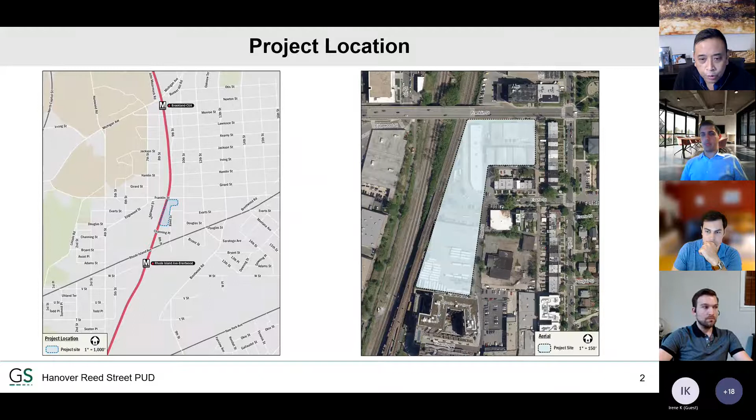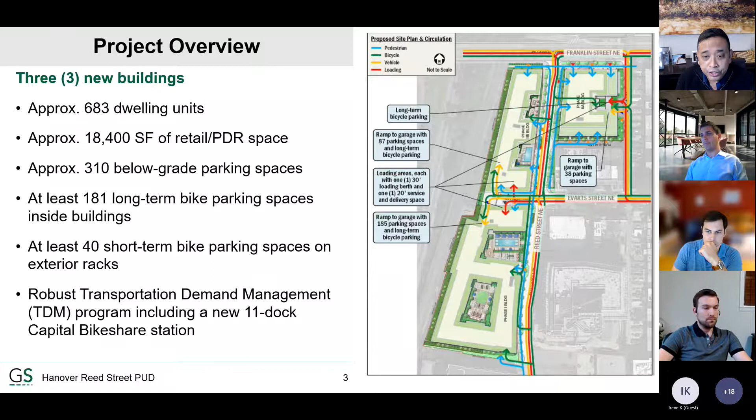When we look at the impacts of a project like this, typically what we do is we meet with DDOT and identify the parameters with which we do our study. As part of that scoping process, which is a formal process that has guidelines, we've identified 11 intersections that we studied. Based on the maximum development plan, we've identified that during the peak hour - the peak hour in the morning during rush hour and the peak hour in the afternoon during rush hour - the project overall will generate 112 trips in the morning and 168 trips in the afternoon. What that means is there's a portion of those trips that are either inbound or outbound. So the total of inbound and outbound is 112 in the morning, and the total of inbound and outbound in the afternoon is 168 during the peak hour. This is an industry standard, and it's a district standard with which we try to identify the impacts related to the project. Next slide.

Erwin, what are the peak hours? What does that mean, what are those hours? So it's the peak - it's the peak hour between 6 and 9 in the morning, essentially the peak system hour between 6 and 9. So you look at all of the intersections and the way they operate between 6 and 9 a.m., and we pick the hour that's most consistently the highest within that hour. Then we do the same thing in the afternoon between 4 and 7. Will, can you look for that, so we can answer Andrei's question as we move forward?

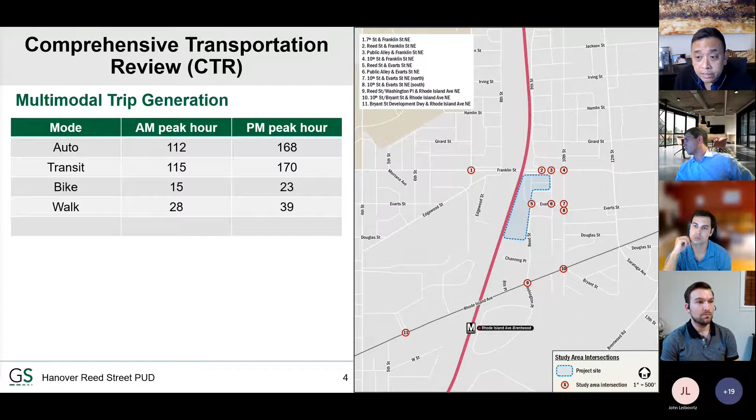I don't want to belabor it, but I was surprised you only pick one day to do your measurements, and it's all sort of extrapolation from that. So typically for the DDOT studies, you pick a typical weekday, and there's an understanding from DDOT that it's an average day. Maybe on any given day it might be a little higher or lower. That's why they don't like us taking traffic counts on a Monday or Friday, because there's more variability on days like that.

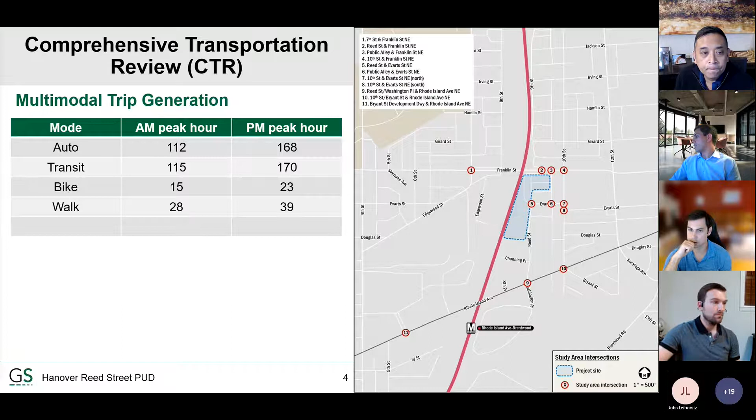Next slide. This essentially goes through what our findings are. As I mentioned before, we were required to study 11 intersections. 3 of the intersections have been identified as impacted. 2 intersections along Rhode Island, which are Rhode Island and 10th, and Rhode Island and Reed Street, currently operate above what's commonly known as acceptable levels of service.

There's somebody, Michael Tran, who has raised his hand.

Oh, hey, sorry, I joined late and you might have covered this. Just on the measurement piece, I know I had told a few of the other neighbors, and Raw as well, that one of the measurements was right in front of my house on Evarts and Reed Street, and Reed Street was blocked off that day. So I just want to make sure, did you guys do it again?

If I could answer that - we looked back at the data and the video as well, and there were no interruptions that we saw on Reed Street traffic during the peak periods. Maybe that happened in the middle of the day, because we study the peak morning and peak evening commuter periods, and the video showed nothing closed.

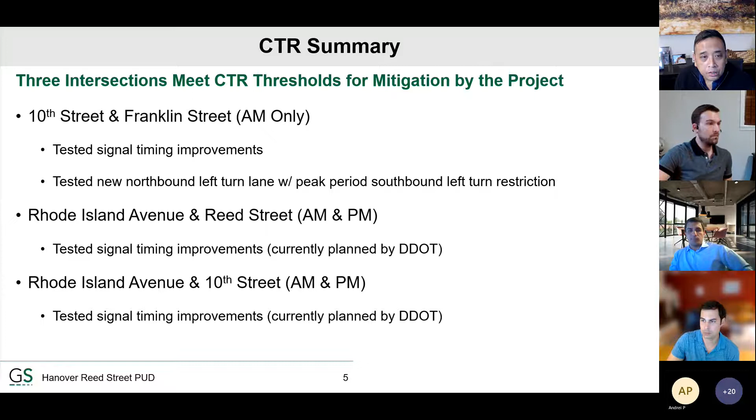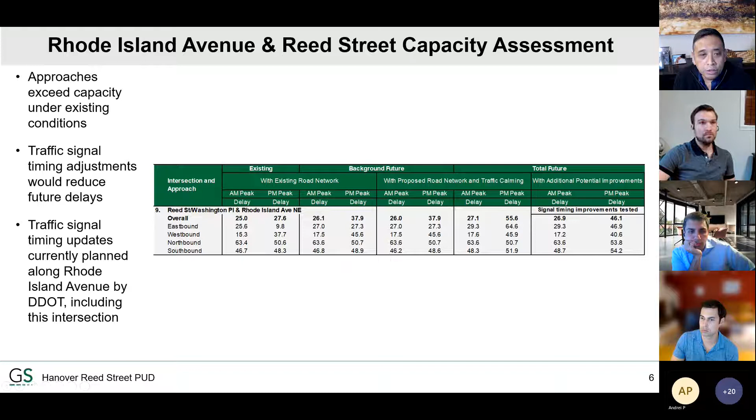With our traffic those get increased, but with the proposed signal timing adjustments those are mitigated. Similarly at the intersection of Rhode Island Avenue and 10th, we have a similar condition where there are delays in the morning. With additional traffic, both background and our project traffic, those are increased, but with proposed signal timing adjustments they're mitigated down to better than existing conditions.

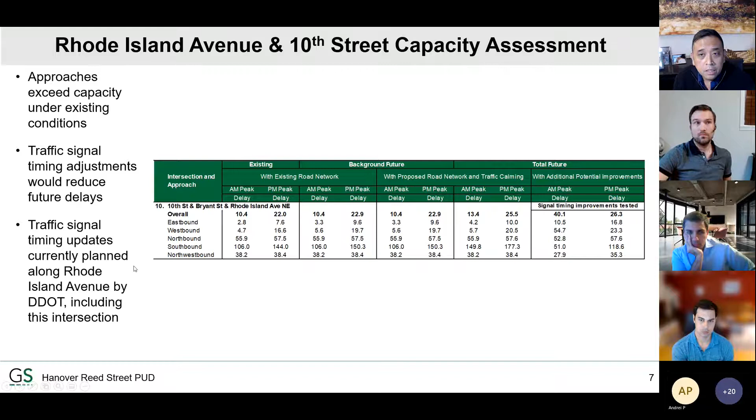The intersection that is of concern is the primary intersection of 10th and Franklin. What we've identified at this intersection is that it operates above capacity in existing conditions. Because of some of the changes we're making, there are two impacts that add to the intersection of 10th and Franklin.

The first impact is what's currently happening today, based on our early community meetings, is that there's a significant cut-through issue that many of the residents on the call today experienced in the alley that runs from Evarts to Franklin. Based on our data collection, it turns out that in the existing condition there are a couple hundred vehicles a day that cut through that intersection, head north on the alley, and turn left.

Because we are creating a plan that will no longer allow those people to cut through the alley and turn left, those vehicles will no longer go up the alley. Those vehicles will now head towards 10th Street to go up and turn left.

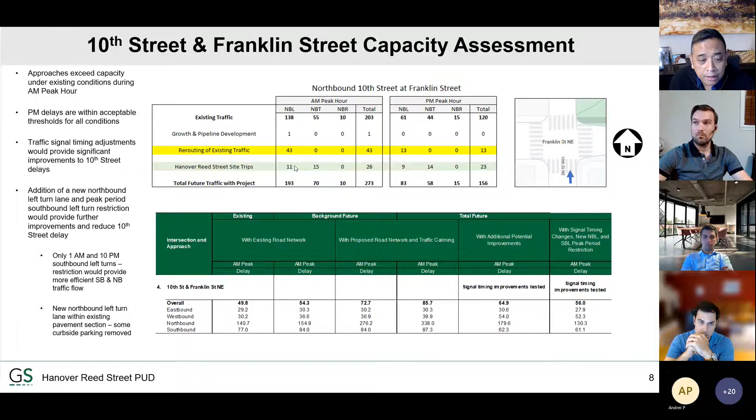In that same time period, we're going to be adding traffic to the intersection of Franklin and 10th of 11 cars turning left and 15 heading through. So the additional impact of both the rerouting of traffic and our project traffic is a situation that increases the delays at this intersection.

It's important to note that even though we are adding traffic at this intersection, the biggest contribution is the fact that we're eliminating the cut-through traffic in the alley. Because of that, we've looked at several ways to mitigate that intersection.

In the potential to mitigate the impact at 10th and Franklin, we have several options. The first is retiming that intersection. The second is potentially adding a left turn lane on the northbound side of 10th Street.

In those instances, we are able to reduce the impacts of both the cut-through traffic as well as our project traffic. However, I think what is more important is that, as Dan had laid out at the beginning of this call, we took another look at the potential for a traffic signal at Reed and Franklin, which would also mitigate this intersection.

So, Erwin, can we, before we move on, just because I know this intersection is so important, let's just make sure everybody understands the chart. So let's make sure I understand the chart.

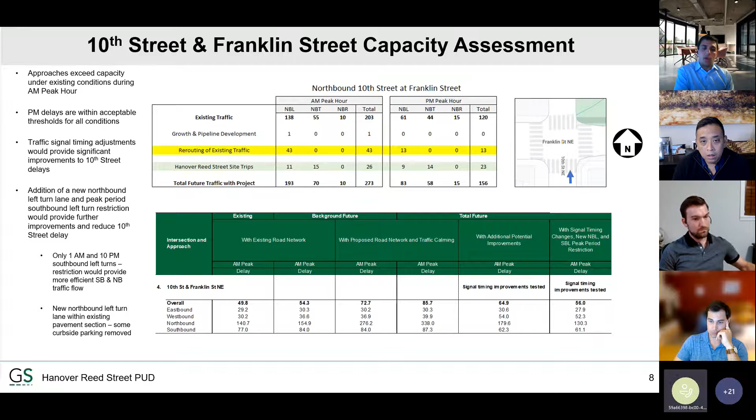How is he a 200 footer? When I'm right behind the apartment building. He's within 200 feet of building 2A.

And as you noted, there's a new apartment building between you and the project. That new apartment building was built by right. We were not involved at all in that apartment building, although to the best of my knowledge it was built legally, by right. This project is a PUD, which does require community input.

We will flyer for the SMD meeting so that you can attend that. I am concerned, so I am not at all interested in cutting you off. At the SMD meeting, we will do a top to bottom discussion of the whole project.

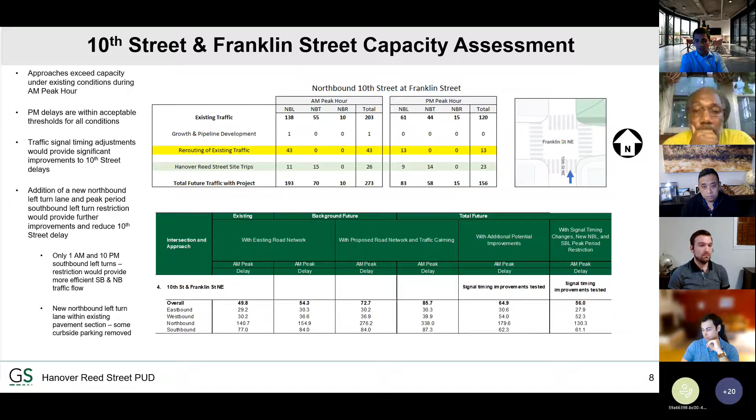The main focus of a lot of residents' concerns who we've been engaging with is traffic, and this meeting was scheduled specifically to address the traffic concerns. It sounds like you have higher level concerns with the development, just whether there should be additional development.

I mean, I'll tell you, if not this, the owners of the property will build something else. But obviously, I am the developer here. I am seeking community support. We would love to have your support.

And the next SMD meeting will be in person. We'll stay as late as we need to address all of the questions. You can talk to me in front of the crowd, you can talk to me individually, we can take you through the project. What I can't do on this call this evening is go top to bottom through the whole project with you.

I apologize, I am sorry that you did not receive notice. We were trying— No, I don't want to hear that. I don't want you to apologize. I don't want to hear apology, don't even apologize. Okay, because it didn't have to happen, it shouldn't have happened. So don't apologize for something that should have happened that you had control over. There's no apology needed for that.

Because you messed up, in other words, I could use the F word, but you messed up. You messed us up. You're talking traffic, you're talking traffic on 10th Street, but you say I'm not a 200-footer. But you're talking about disrupting traffic in front of my house.

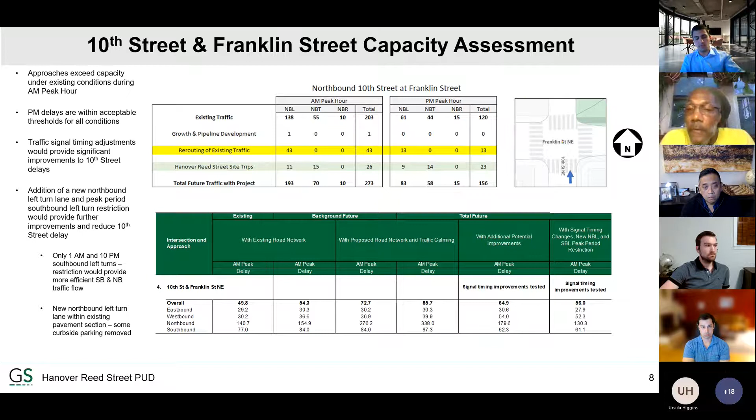None of this accounts for the light. We want to present the light. Erwin, let's go to the next slide and keep going. So the next slide is consistent with our presentation related to 10th and Franklin. And obviously, in order to get to 10th and Franklin, you have to go through 10th and Evarts.

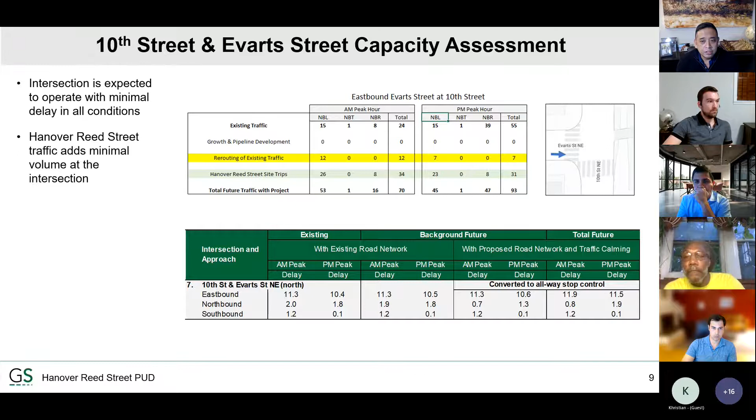The next slide is essentially looking at Franklin and Reed Street. So at the intersection of Franklin and Reed. Erwin, I'm so sorry to interrupt.

Could I ask a quick question just about 10th and Evarts real quick before you move on? My question is, has Hanover reached out to anyone with DDOT's Safe Routes to School team to see whether either raised crosswalks or a raised intersection at 10th and Evarts would be feasible? Given the proximity to the school and all of the traffic, it might be wise to try and push for something like that while all of this development is going on and all of these road changes are happening. So I don't know if you've reached out to anyone from there.

So as part of the CTR review, the Safe Routes to School team will be involved in providing some of their comments.

We're currently with DDOT, so they will be taking a look at that. Additionally, we've worked on multiple public and private schools in the district, so we do have connections and contacts at the Safe Routes to School office within the district.

What we have done to help facilitate those crossings is create some curb extensions and bump outs so that the crossings are minimized to reduce the distance any pedestrian or student would need to cross going across 10th Street. So we've tried to facilitate those crossings as best as we can.

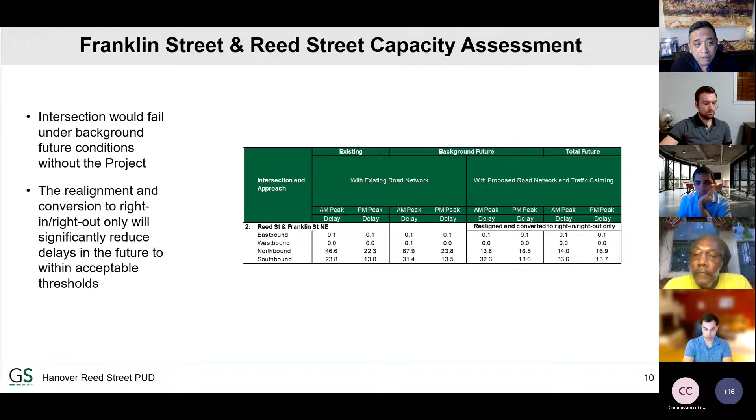Relative to Franklin and Reed Street, the current plan is to make it right in, right out. Currently some left turns take place there, but we are restricting all left turns under our current proposal to help facilitate safer pedestrian crossings along the intersections along Franklin. Erwin, next slide.

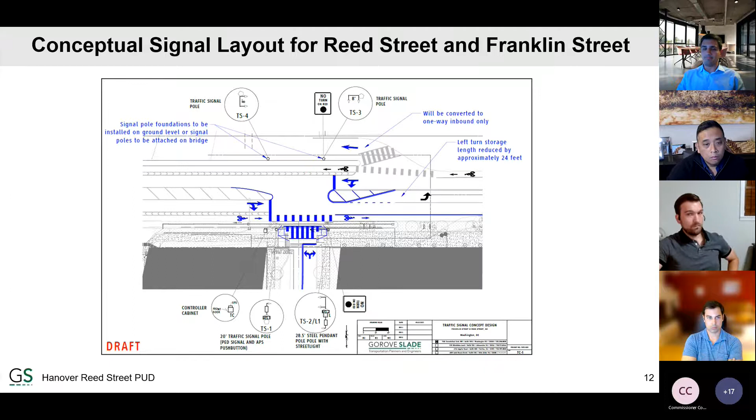Let's go quickly through the mitigation that we had otherwise planned, and then we can open the floor up to questions and come back to different exhibits.

Okay, Dave, do you want me to go through this, or do you want to go through the same? Yeah, but Erwin, just because I think a lot of people have seen all of this, why don't we do the rest of the slides in, let's say, 5 to 7 minutes? Anybody, if you think we're going too quickly, please raise a hand or speak up, and we'll come back to any of these slides. But I think a lot of members of the community have.

Mr. Wentworth, go ahead. You took your hand down, Mr. Wentworth - did you want to ask a question? Here, I can - do you want me to unmute? I can't unmute you, you'd have to unmute yourself. No, it was a mistake. Oh, okay, I'm gonna lower your hand.

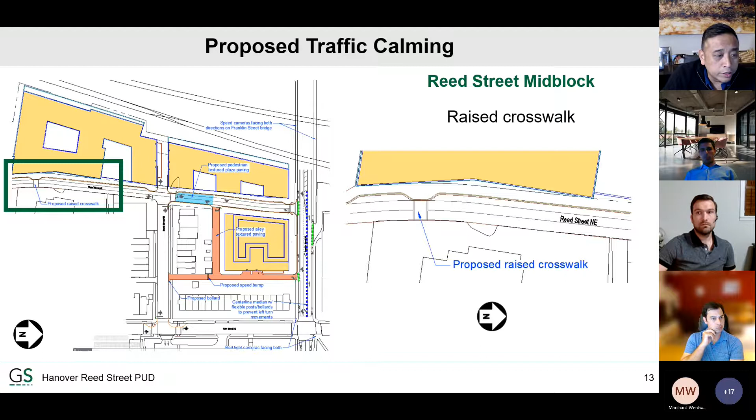Okay, Erwin, let's roll through these and then we'll come back and address questions. Yes, this is the same plan we have presented in previous community and ANC meetings. Just a quick summary of the proposed traffic calming plan. So just south of Evarts, across from the first phase of our project, we're identifying a raised crosswalk, which is within that green box.

At the intersection of Reed Street and Evarts, we're identifying this intersection as a four-way intersection. On the southbound approach, there is proposed to be a raised crosswalk, so if you're coming from Franklin south to Evarts, you're coming to a full stop where you're met by a raised crosswalk.

At the intersection of Franklin and Reed, we've identified this as right turn in, right turn out. Obviously this changes if we get the signal, but what's currently proposed is right turn in, right turn out, and bollards across the Franklin Street center line to prevent any left turns either in or out.

Oh, I see, okay, my slides are lagging a little bit. So just give it a second. Okay, but sorry, keep going.

The next slide is at the intersection of 10th and Evarts. As I mentioned before, along 10th Street, there are no locations to stop, so you essentially flow freely from Rhode Island Avenue all the way up to Franklin. At this intersection, we've identified the potential for making it an all-way stop. We're also extending the curbs out to enable pedestrians to cross 10th Street across a shorter distance. Making it an all-way stop also creates a better situation for pedestrians to cross at this location.

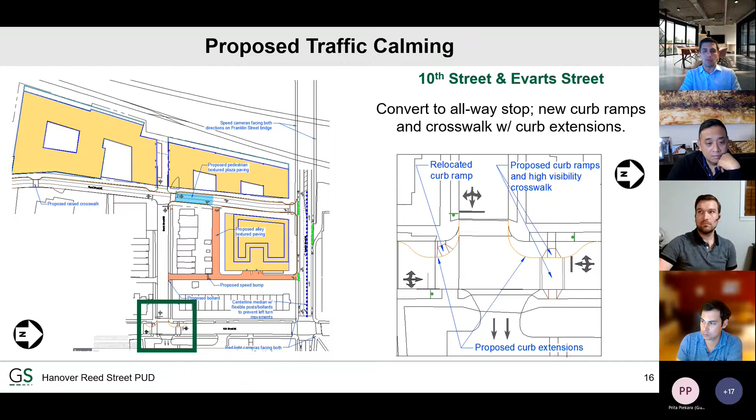We are now. Yes. So at the intersection of the alley and Franklin Street, we've identified extending the bollards across to prevent any lefts in or lefts out. It would be right in, right out at that location. And then keep on going, Will.

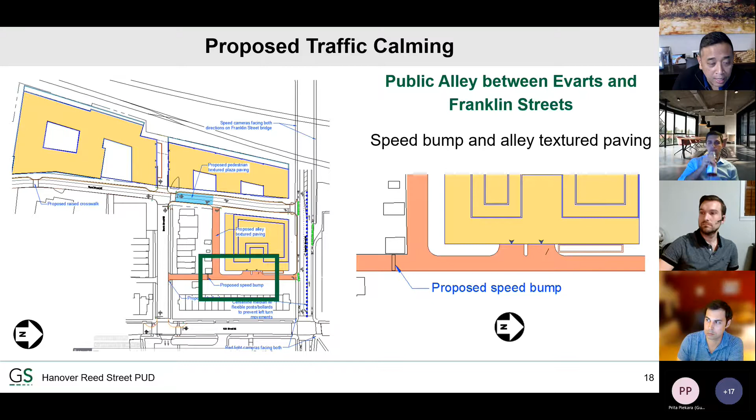Next slide. And then in the alley itself, in the 10th Street alley, we have identified a proposed speed bump as well as alley textured paving within the alley, identified in that lavender color. And I believe that's it. The bollard, that's the last thing. Oh, and the bollard to protect the corner. Yes, that's a mud pit. That's a mud pit today.

So, can I raise just a reaction to these slides? Because this is something we've talked about quite a bit back in December and January.

I continue to be concerned about the interface between the north end of that alley, the north-south alley, and Franklin Street, with lots of kids traversing. I do think the median bollards will help a little bit, and I do think that if the Franklin and Reed intersection gets a traffic signal, that will help a lot.

Obviously, you're not going to put a signal at the end of the alley. We had talked about two mitigations, which I think are in the CBA as 'under, if DDOT agrees.' One was to put a speed bump at the north end of the alley, because you can't put a continuous sidewalk there since an alley effectively is a continuous sidewalk the way it meets the grade of the sidewalk. So we had sort of agreed on putting a speed bump at the north end of the alley to get people to slow down before they run over kids turning right onto Franklin Street.

And the other was pedestrian flasher lights, which I saw in your plan, I think it was the CTR. You have them indicated for the Reed and Franklin intersection, but not the alley intersection. So my request is, I know you think DDOT is going to push back on things and not agree to everything. I think it's our job to try to convince them as a community that this is important. There are 6 schools. It's not a standard condition. There aren't many streets that have 6 schools literally like a block away.

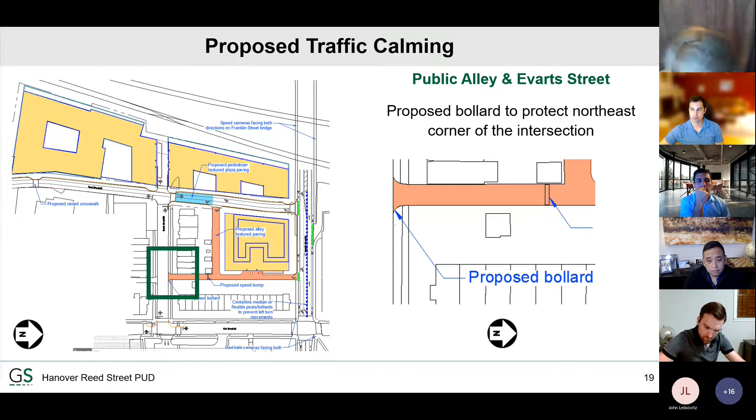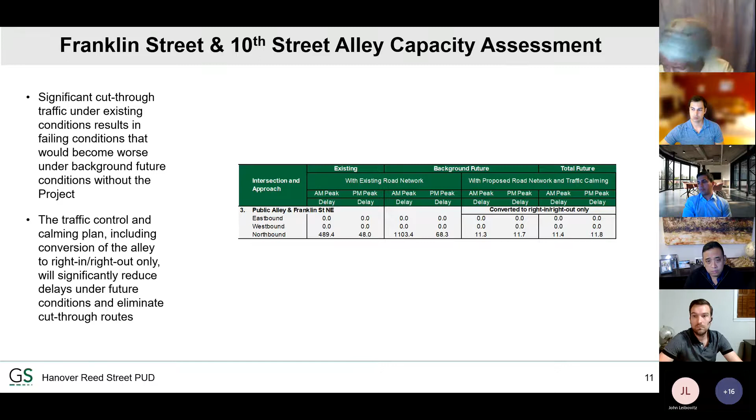Irene was trying to ask a question. Dan, I hate to be so ignorant here, but can you go back to slide 11 and explain to me in layman's terms, just simplistically, what does a raised crosswalk look like? Go back to slide 11.

Oh, what a raised crosswalk is? Essentially, a raised crosswalk, if you can imagine a speed bump, but the speed bump is wide enough that it's the width of a normal crosswalk. So it serves two purposes: one, it provides a raised crossing, and two, there's a grade change. So it's essentially a speed bump at a crosswalk combined. That's what a raised crosswalk is.

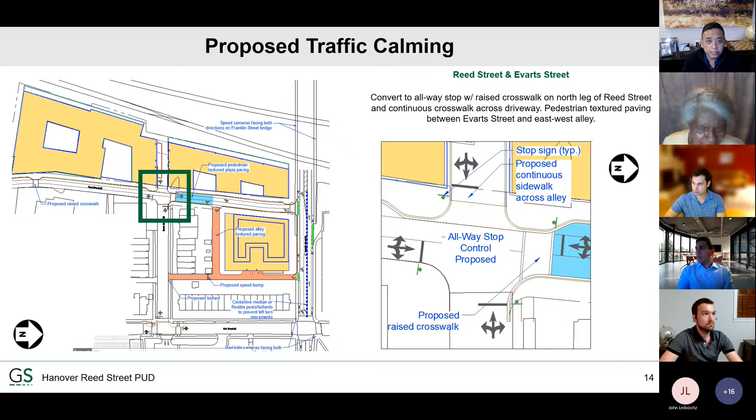So Irene, if you look... I lost the note I had. I'm at 900 Evarts Street, the 900 block of Evarts Street, and I feel like we're getting the short end of the stick. I've been here long enough, I'm like Mr. Merriweather, I've been here a long time, and I had to call the ambulance for a kid that got hit on his bike going through that alley toward 10th Street. He was on Evarts, crossed that little alley, and he's all right. But all they did was put up a stop, the speed sign.

That's all. Anyway, I understand what you're saying about community safety, and that's our business, that's what we should be doing. So I thank you for what you were doing. But I was just trying to understand what's happening from Franklin going down 10th and then to Evarts. Irene, if you look at what I'm sharing, this is what a raised crosswalk looks like.

Okay, yeah, it's like a speed bump. Okay, all right, that's visually what it is. We're going to put a bunch of these in, I think three of these.

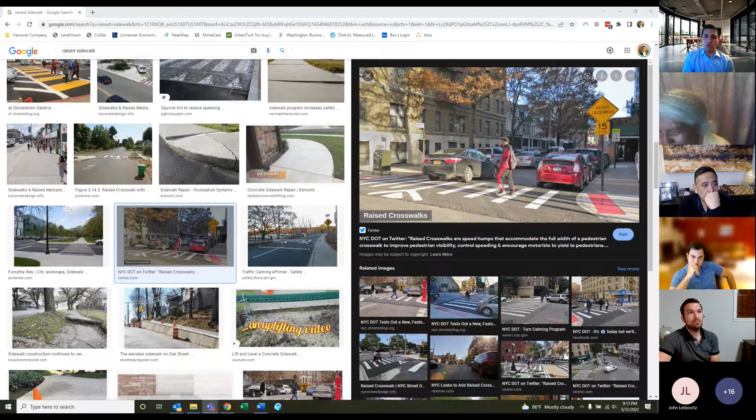Okay, Will, do you want to go back to the presentation? Where did I put it down? Are you referring to this slide, Irene? I think proposed calming, no, it wasn't 15, I don't remember it being 15.

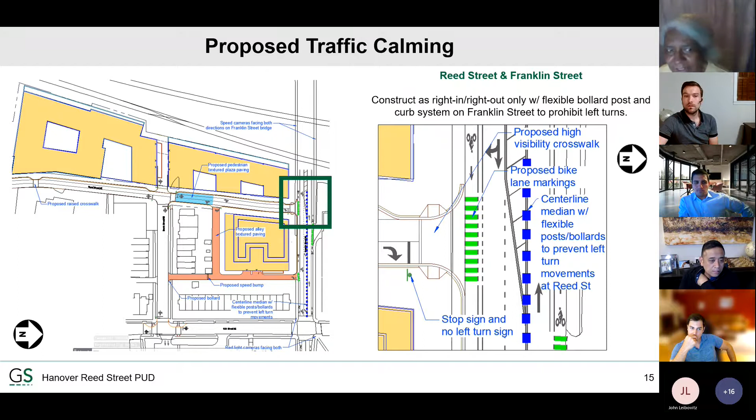You were describing how you're coming off of Franklin, going down off of Franklin and onto that alley, 10th, and then down -- here's the alley right here. Evarts. Yeah, okay, you're coming off of Franklin. And what turn do you make out of that alley onto Evarts? You're at 900 Evarts going toward 10th. Can you make the left after you go down the alley there?

If you're going down the alley towards Evarts, you can make any turn onto Evarts. The only turns we're removing on the alley are at Franklin, where it's going to become right in, right out. You can see on the right side of this image, flexible bollards will be in the median so people won't physically be able to make lefts out of there, which is the most dangerous movement and the reason for the cut-through traffic -- people turning left there. We measured hundreds of people doing that a day. Yeah, it's very dangerous on the street.

Very dangerous, yeah. Irene, and also for us, coming to Evarts, they're proposing a speed bump, like the alley behind our house. So basically, right after that alley, there's going to be a speed bump, and that should slow people coming down onto Evarts, where that's a dangerous one as well.

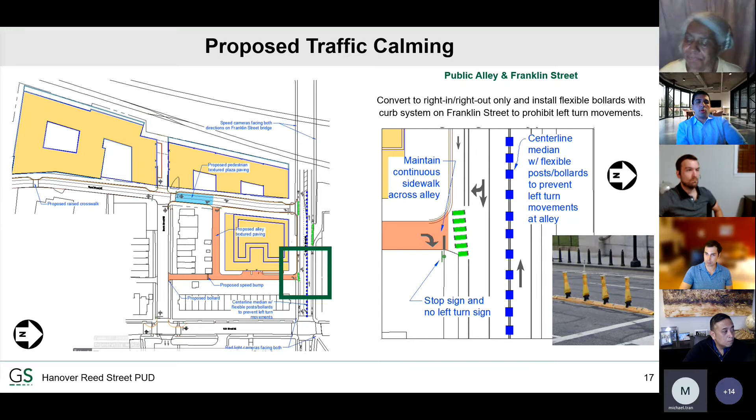Dan, on the 15th - maybe I just haven't attended one of these before with DDOT, maybe the commissioners can help me as well. You're presenting - are we just presenting our side? Are we voicing support for things? Like, do we get to say, hey, they put this in, we want more? What's the format?

So the format is, this is just a meeting we agreed to as part of our community benefits agreement. We're going to make an initial presentation to Hanover, Erwin and Will, that'll probably look pretty similar to this, except I think the base case in that presentation is going to be the traffic light. So this will be a little bit different because of that, but we're going to present it, and then at least two people, maybe more, from DDOT will be present.

I would really appreciate, given that this was negotiated with the community, to affirmatively express support for the plan. What I think we would then want in an ideal world is to ask DDOT for feedback.

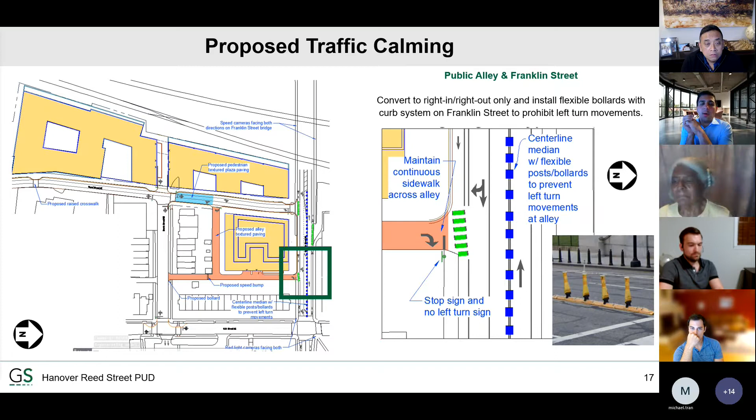I think if there's desire for a community follow-up with DDOT, we can always get another DDOT meeting. I do want to, it's in my nature to lower expectations and then try to beat them.

I think it would be good to just be thinking as a group about priorities, what the most important aspects of the proposals are. I think if we all go into it with the mindset that we're going to get everything we're asking for, we're happy to pay for it, it's not an issue, we'll do this, we'll do everything we've agreed to. I just think it's very unlikely that DDOT will say yes to everything.

I think we just make the conversation as productive as we can. And then if we can have another conversation after that, if people think it would be helpful, that's fine. I think, Erwin, we need to send them something on the light before the meeting so that they can be prepared to speak to the light. Otherwise, I think... yes.